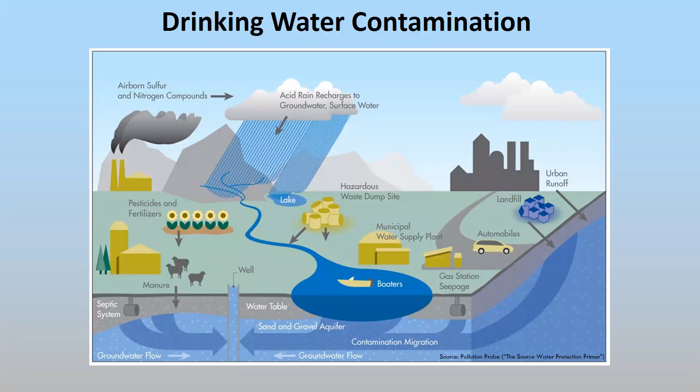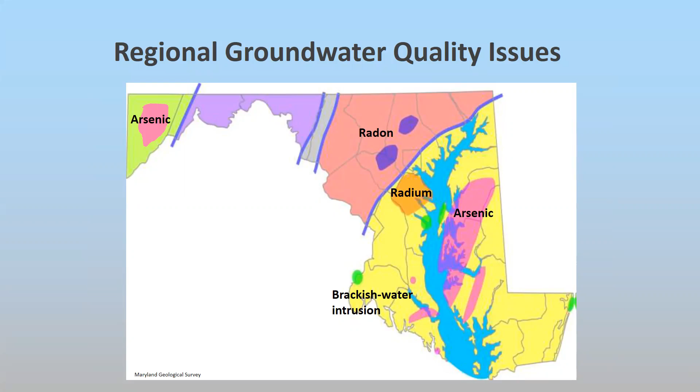It's also important to note that in certain areas, there are natural contaminants in our geology. In Maryland, arsenic, radium, and radon are three examples. And then we also have the influence of brackish water intrusion from both the Chesapeake Bay and the coastal bay. So when we think about treatment, it's really important to note that you really need to understand your water. Get to know your water. Then with that information, you can determine whether or not treatment is necessary.

If you're on a public source and you get a water bill every month, that water is regulated by EPA and then also the appropriate state agency. And that water is tested on a regular basis for 90 some odd contaminants. And EPA mandates that public utilities provide an annual report to all the consumers or customers. It's called the Consumer Confidence Report.

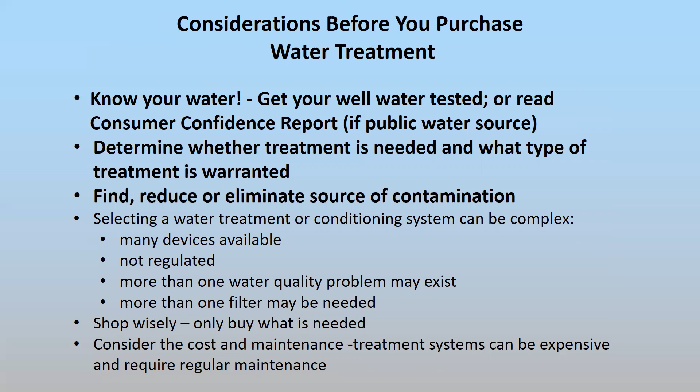And then if you do find an issue with your water, particularly if you have a private well, it's ultimately your responsibility because it's not regulated. You're responsible for testing your water and also maintaining and taking care of your well. So if you did find a source of contamination with a private well, you'd want to first identify and eliminate that source of contamination, whatever that may be.

So with public water sources, again, as I said, they're regulated by EPA through the Safe Drinking Water Act. And then each state has an agency that's delegated to maintain and regulate drinking water. In the case of Maryland, that's the Maryland Department of Environment. So under the EPA, there are what's called drinking water standards, regulations, and they test on a continual basis for 90 contaminants. And some states require additional analyses. These include disinfectants, for example, chlorine is used to kill off bacteria. And then those disinfection chemicals can break down and produce byproducts. There's inorganic chemicals, microorganisms, bacteria, viruses, organic chemicals, and even radionuclides.

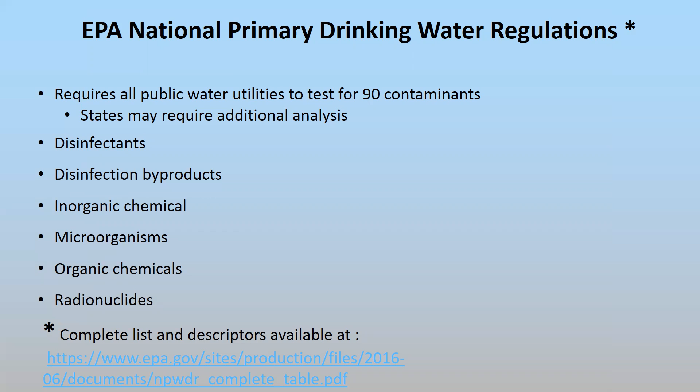So here's an example. Here's actually the complete current list in 2020 of what is being tested by public utilities. So you have the disinfectants, you have the various disinfectant byproducts, you have many of the inorganic chemicals that we're familiar with, arsenic, barium, fluoride, lead, copper, mercury, things like that. We have the microorganisms. These are the common bacteria species that can be found particularly in surface water sources. Then there's the suite of radionuclides, and then there's a whole long list of industrial and agricultural organic chemicals, as you can see here.

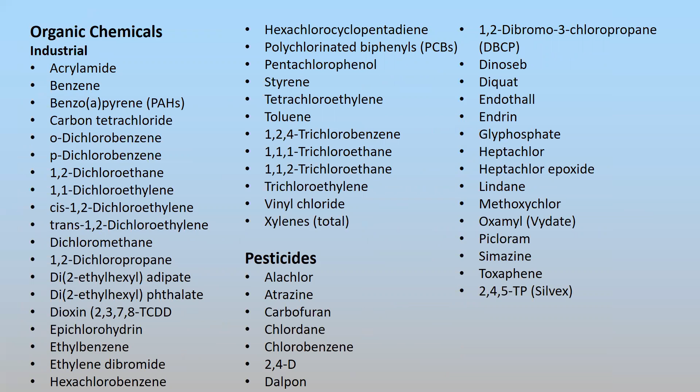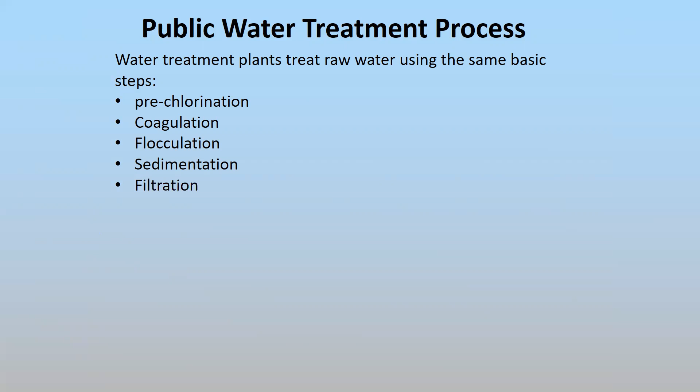So in that public water treatment, there's several steps that water goes through, dependent upon what type of source water. And that's important to note that public utilities use both surface water, that could be a reservoir, it could be river water, or they use wells. In any case, they treat the water by pre-chlorination. That again is to kill off bacteria. Then they go through several steps of settling, flocculating, coagulating the solids to remove all that organic material that may be coming from the source. They filter that through several different types of processes.

Then they go ahead and may add fluoride, which has been added as a means of reducing tooth decay. There is new research going on that is suggesting that fluoride may actually have some health concerns, and so some utilities are electing not to add fluoride, especially since dental care has improved greatly in the United States, and many of the dental products already have fluoride in them.

Then there's a post-chlorination process. This is again to ensure that the water leaving the treatment facility is free of bacterial contamination. Then before it leaves, it goes through a corrosion control treatment. And they use different compounds here, various phosphates, some silicates, and also some carbonate adjusters, such as lime, for example. And this is to be sure that the water is not corrosive. So corrosive water is the cause of many of the issues that we've seen with lead and copper, for example.

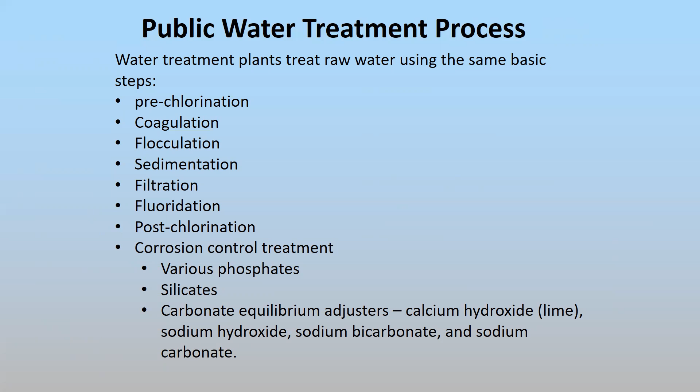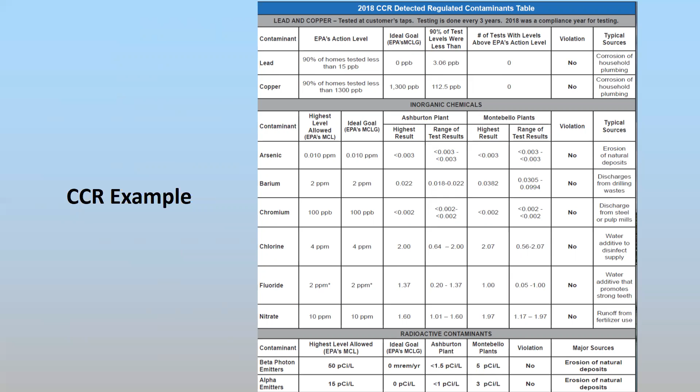If you're on a private well, as I said, you are responsible for doing your water quality testing since it's not regulated. And this is what is recommended on an annual basis: to test for coliform bacteria, E. coli, and nitrates. These are indicators of contamination from animal waste, possibly fertilizers, in the case of nitrates. Since groundwater does move, albeit very slowly, it's important to test annually for at least these three.

And if you were to get a positive result, then you'd want to determine what is the source of that. Is it a septic tank connection issue? Is it animal waste? Is there some damage to your wellhead, for example? So again, you'd want to test for this annually, and then test for these other contaminants on about a 3-year cycle. That's chloride, pH, lead, copper, manganese, hardness, total dissolved solids, sulfates.

And then test if you have any naturally occurring or local land uses that may be presenting some possible contamination. Your local health department has a wealth of information on this. It's a great resource. They can tell you if there's any typical land issues or naturally occurring contaminants in your area. So please contact your health department.

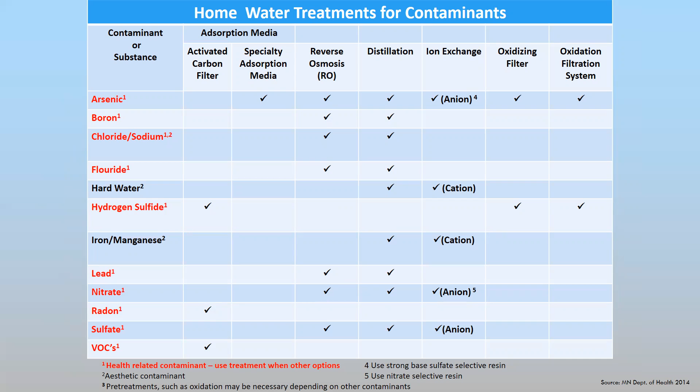If you test your well water and it was to come back and you had one or two of these contaminants, you definitely want to determine if one filter could treat for both contaminants. Sometimes that's not the case, and you might have to have two different types of filters or more, again, dependent upon your water quality.

So when we look at treatment systems, there's two basic types. There's point of entry, or whole house treatment. And again, that's just that. It's going to take the water as it comes from the well and run it through the filter, and it's going to supply your entire house. The other option is what's called point of use. That's right there at, say, for example, your kitchen faucet. If that's what you use for your drinking and your cooking purposes, you could put a point of use filter either directly onto the faucet or under the sink, for example.

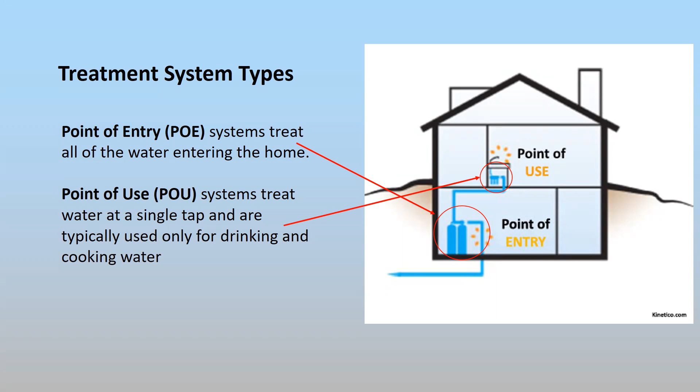Here's some examples of point of use filters, things that you can put on the faucet, filters that go into your refrigerator, or in the case on the left, there's an under the sink RO, or reverse osmosis filter. The important thing with any of these filters is be sure that you see an independent certification label. And here's some examples here: NSF, UL, and the Water Quality Association.

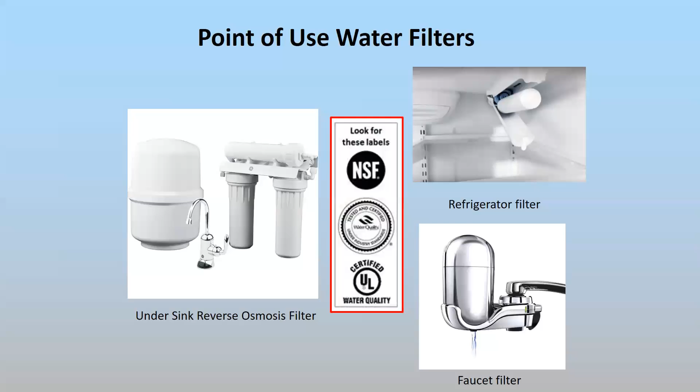Very important, because water filters are not regulated by any government entity. And so this third party, independent type of certification is very important. And when you buy a filter, it'll have on the label one or more of these certification emblems, but it also will describe to you what those filters will filter out, what contaminants and what percent of contaminant removal that they provide.

So going through the different types of filters, one common one is a sediment filter, and it's basically trapping out any sort of suspended particles, whether it be sand or clay, or even rust or oxidized iron, for example. These sediment filters are available as point of entry or point of use. The issue with any filter is eventually they can get filled or clog, and so they need to be replaced. And dependent upon the sediment load that you have in your water, these filters can get clogged fairly quickly.

And so in some cases, if you have a high sediment load, you could have several stages of these sediment filters, or larger sediment filters that would enable the water to be treated, and you wouldn't have to change the filter out as often. If you do not change the filter, what can happen is not only will it clog, but you can actually get bacterial buildup over time.

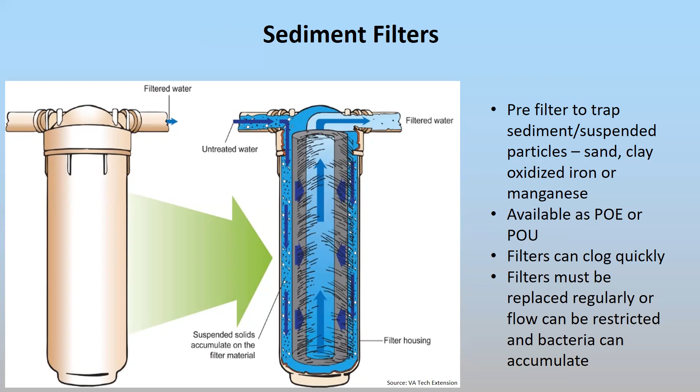Activated carbon filter. If you've ever had an aquarium, you're probably familiar with this, that there's carbon that's used to filter out the aquarium water. In this case, obviously, it's used for drinking water. And these typically are used to remove any sort of unpleasant taste or odor. Chlorine, for example, even some of the pesticides. If you look at the common refrigerator filter, oftentimes it'll remove chlorine and some pesticides. You also get some heavy metal removal. Again, it depends upon the type of filter.

These are available both for point of use under the sink or at your faucet, but also whole house or POE. Again, these things need to be changed on a regular basis, and you have to follow the manufacturer's recommendation, because the carbon will get saturated essentially over time with various contaminants, and then it will no longer function.

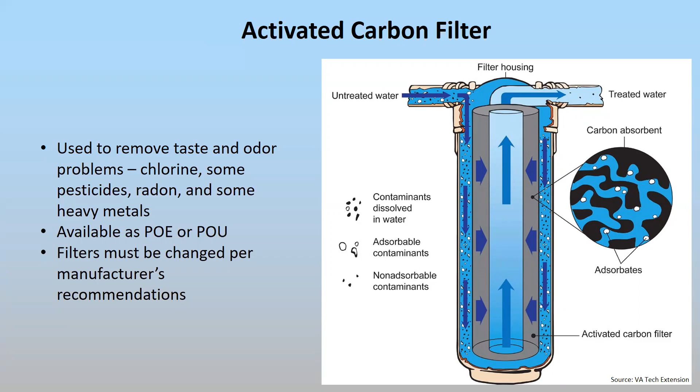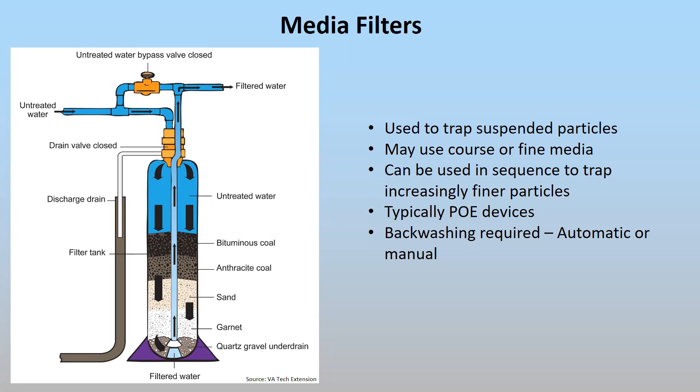And then there's different types of media filters. For example, this is again used to trap solids. This diagram shows different types of compounds that are used: quartz, sand, and different types of coal products. Again, it is designed to trap out solids. Solids get trapped in between these different types of particles. This is a whole house or POE type of device. And then it's usually set up on an automatic backwash where water will flush the system and then release the sediments from the media particles.

You have acid neutralizing filters. These are used typically if you have low pH. And low pH is one of the causes for water corrosivity. And so these filters use a neutralizing media, whether it's calcium carbonate or marble chips, for example. And then this media needs to be replenished periodically. And again, that depends upon the severity or how low your pH is and how much water you're actually treating.

But when you're using a neutralizing filter, it's important to note that it likely will increase your water hardness, which is calcium and magnesium. So if you're using calcium carbonate or marble chips, which has a lot of calcium in it, you're going to be adding calcium to your water. Calcium is an important necessary nutrient, and it's not a health hazard, other than it can lead to increased hardness. You may get a buildup of scale, either in your water heater or little deposits on your dishes, for example.

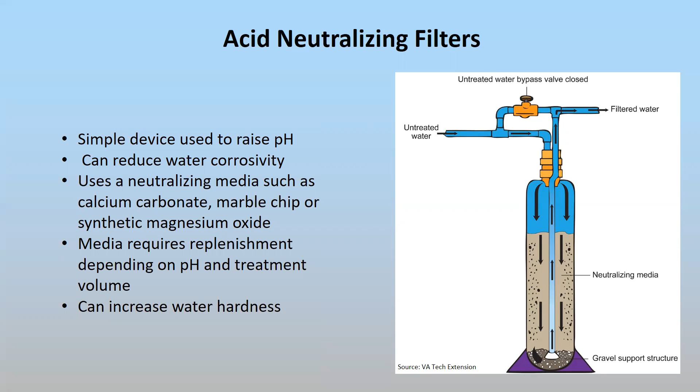And if you do have hardness, you're going to typically look at whether or not a water softener makes sense. If you have very hard water to where you're getting a lot of scale buildup, then one of your options is to use an ion exchange water softener. And the important thing to note here with this type of treatment system is that you're basically replacing the calcium and magnesium ions with sodium. And so using one of these, you're increasing the sodium level of your drinking water. And if you're on a low sodium diet, then this may not be the right process for you to consider.

There is some new technology coming out, albeit slow. It's a saltless water conditioner, which is basically a little different. It uses electricity, but there's not a lot of companies selling this equipment. So, we anticipate that we'll see more and more of this option for conditioning and remediating hardness.

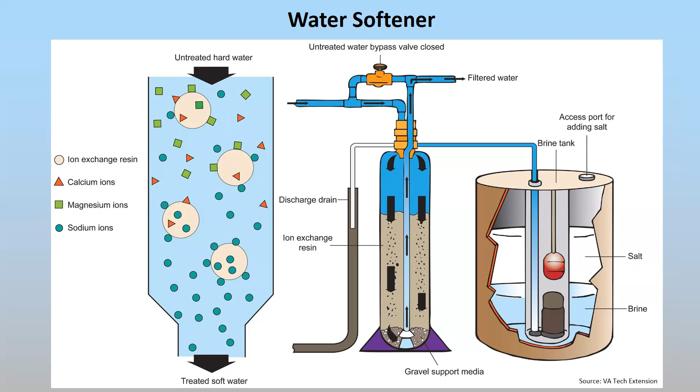These systems have to be periodically not only adding salt to your system, but then it's continually backwashed as the resin gets clogged up with sodium particles. Typically, these are used if your water is hard, 120 parts per million, milligrams per liter, same thing. And again, it does require additional salt on a periodic basis. Again, the frequency of adding salt will depend upon how much water is being treated and the size of your system.

One of the things you need to consider with a water softener is that the backwash is a significant source of chloride. And so you need to think about where is that water being discharged. If you're on a septic system, there are certain types of advanced treatment systems that do not want the sodium and the chloride being discharged into that system. The other thing to note about chloride is that once you add it to the soil, it basically goes straight down to the groundwater. It's not bound in soil like some other contaminants. So again, you need to think about that. In some cases, water softeners will be used to treat iron or manganese as well.

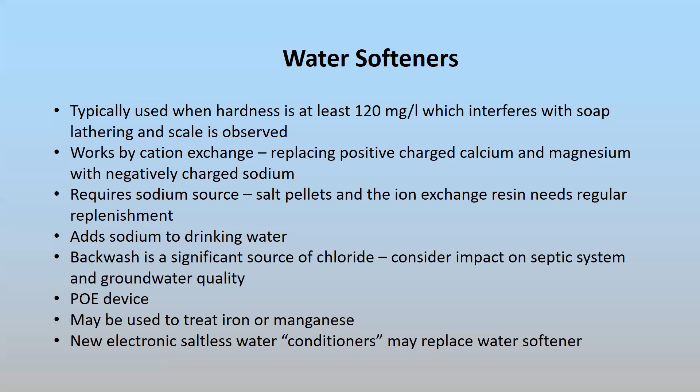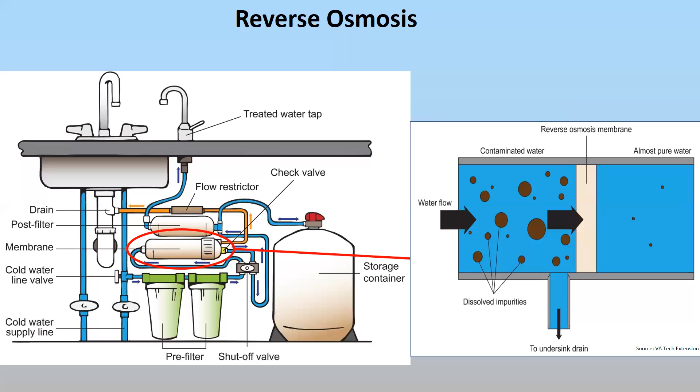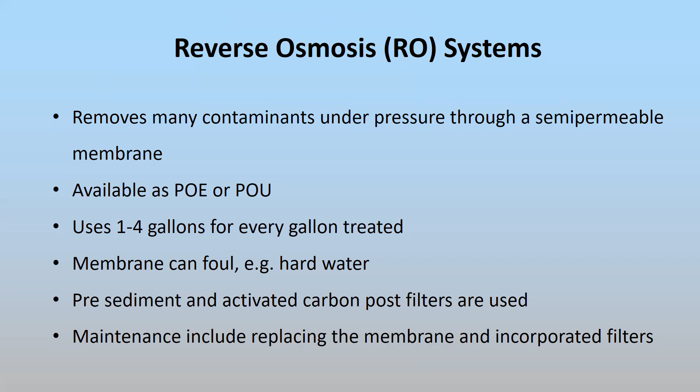One of the important things to note about RO is they have a lot of water usage. So they use anywhere from 1 to 4 gallons of water to treat 1 gallon itself. So again, the system's going to have a lot of wastewater, and you need to consider what you're going to do with that wastewater. Okay, the membrane can foul, particularly if you have hard water. And as I mentioned, there's pre-sediment and carbon filters typically incorporated with these systems. And the membrane might need to be replaced periodically, again, depending upon the amount that's being treated.

Now for bacterial treatment, ultraviolet light or UV disinfection is a common treatment system. It uses the ultraviolet spectra of light to kill off bacteria. And this is effective as long as your total coliform and E. coli concentrations are below a certain level.

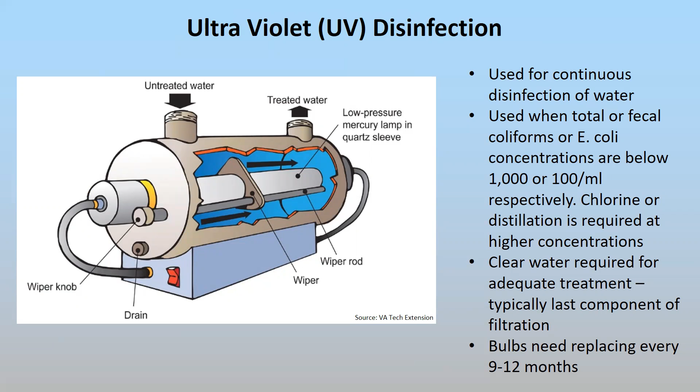If you have a very high concentration of bacteria, you'll probably have to look at some other type of treatment system, whether that's an automatic chlorination system or some sort of distillation process. But typically, a UV system is very effective. The water needs to be relatively clear, very clear actually, for the light to penetrate through all the water. And the bulbs probably need to be replaced every 9 to 12 months.

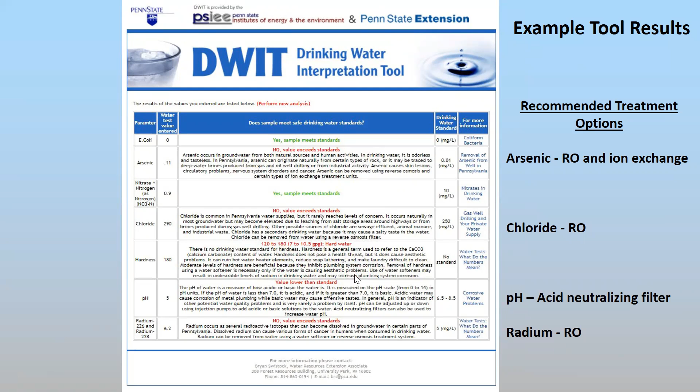Here's one, hardness. Again, I put in 180, which is hard water. This is, again, not a health hazard. It's more of an aesthetic issue, but it does tell you information about where it comes from, some of the symptoms that you might be noticing, but it also tells you how to treat that. So it's, again, a great resource for you to consider.

So building on considerations about treatment, besides knowing your water, it's important to note that when shopping or deciding what sort of water treatment, there's a lot of choices out there. They're not regulated, as I mentioned earlier. And if you have more than one water quality contaminant, then you may have to look at more than one type of filter.

We recommend that you only buy what is needed. There are some systems that come with various components, but what you want to know is that whatever treatment system you buy, it has to be maintained. Not only do you have that upfront cost, but it has to be maintained. So if it has multiple filters, you're going to have to be exchanging or replacing multiple filters. So quick rule of thumb, only buy what you need, okay? And you only know what you need after you test your water.

The other thing with some types of systems, particularly those with periodic backwash, is consider what you're going to do with that waste stream, that backwash water. It does have impact on septic systems potentially. And if you then opt to go with surface discharge, and it's a water softener, just know that chloride can kill vegetation and impact groundwater quality.

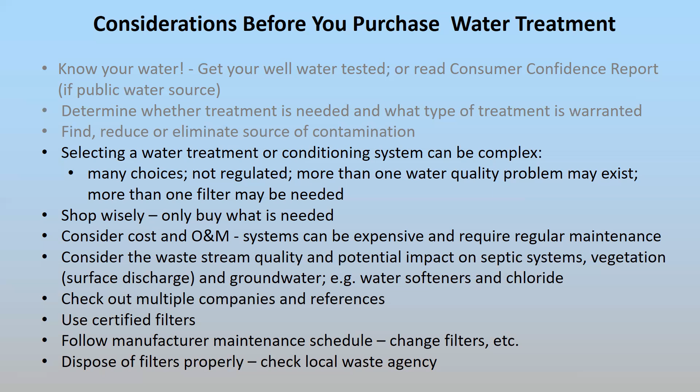So again, just some tips for you to consider before you actually purchase the water treatment, to make sure that you're getting what you need and that you understand what it takes to not only operate, but also to maintain the water treatment system.